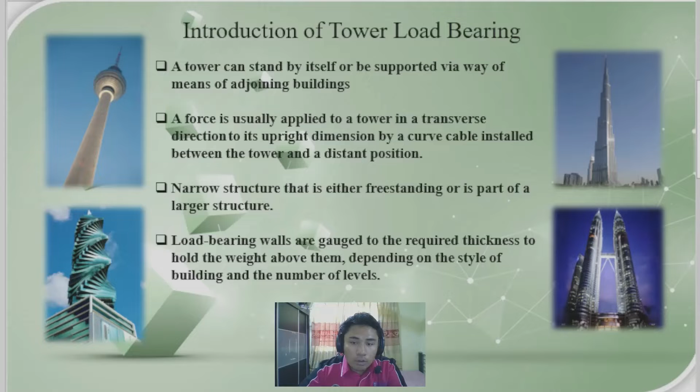Load-bearing walls are gauged to the required thickness to hold the weight above them, depending on the style of building and the number of levels. Without this, an exterior wall could become unstable if the load exceeds the strength of the material used, potentially resulting in the structure collapsing. This is our problem background for this project.

Straw is used as the principal structural material in straw load-bearing tower construction. The model of the tower must not weigh more than 0.7 kg and be 25 cm in length, 25 cm in width, and 30 cm in height to meet the project's requirement. The project goal is to construct a sturdy and stable tower.

Furthermore, the project recommends that the ability to sustain the maximum load be used as a criterion. While investigating the highest force applied to the structure, establish a design solution and calculate for the load bearing tower model the normal stress, normal strain, thin cylinder, and column.

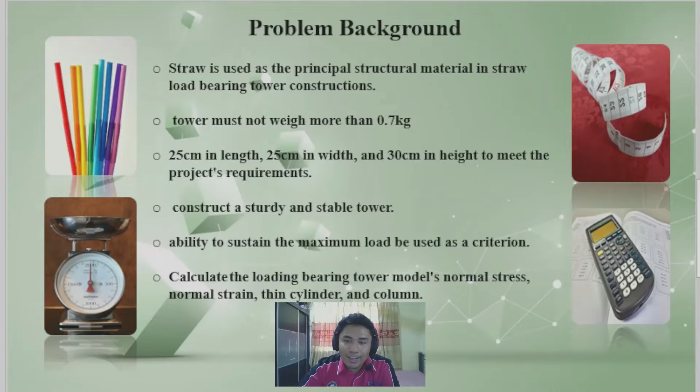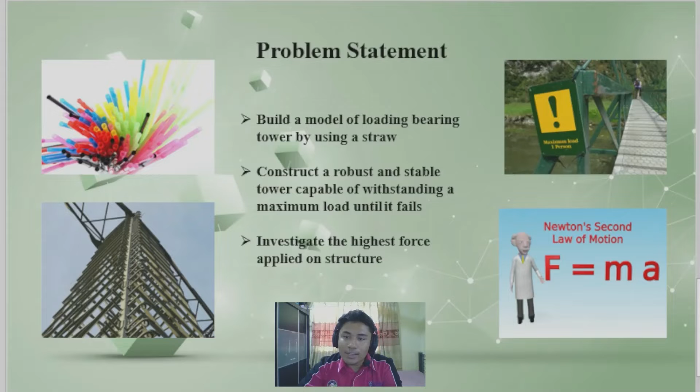For our problem statement, first, to build a model of a load bearing tower using straw. Next, to construct a robust and stable tower capable of withstanding a maximum load until it fails. Lastly, to investigate the highest force applied on the structure.

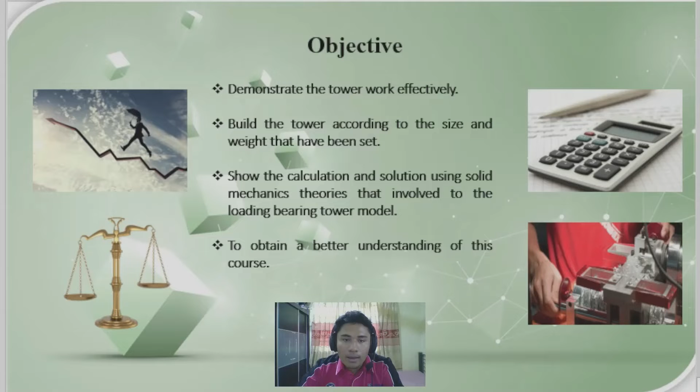Next is the objective of our project. First, to demonstrate that the tower works effectively. Second, build the tower according to the size and weight that have been set. Thirdly, to show the calculation and solution using solid mechanics theories involved in the load bearing tower model. Lastly, to obtain a better understanding of this course.

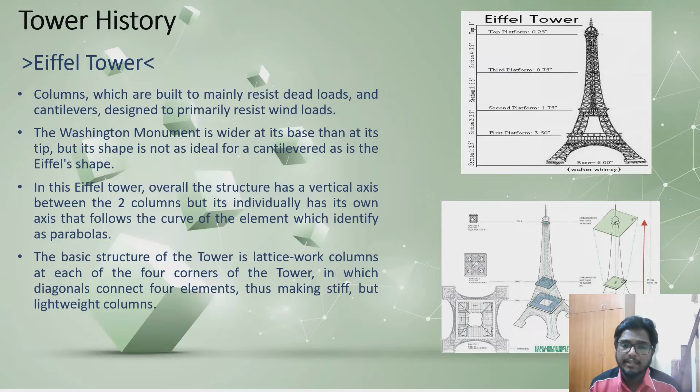My first slide is about the Eiffel Tower, about its history. In the Eiffel Tower, overall the structure has a vertical axis between the two columns, but each individually has its own axis that follows the curve of the element, identified as parabolas. The basic structure of the tower is a lattice work column at each of the four corners of the tower, in which diagonals connect four elements, thus making stiff but lightweight columns.

The Eiffel Tower is one of the towers outside Malaysia. Even in Malaysia, we have a lot of towers like that, like the KLCC towers. One example I took is the Langkawi Sky Bridge, located at the top of the gondola ropeway, 660 meters above sea level. The bridge consists of a curving deck, 125 meters long, suspended from a single spindle-like truss tower that leans back at an 80-degree angle. I've given a picture of it, on top at 660 meters above sea level.

The pylon has an 81.5 meter elevation difference with the deck, approximately 55 meters above the foundation at the bottom of the gorge at an elevation of 605 meters. The deck is supported by a series of triangular trusses. A pylon is a bar or rod that supports a structure such as a bridge or an overpass on a highway. So it makes it stronger to support.

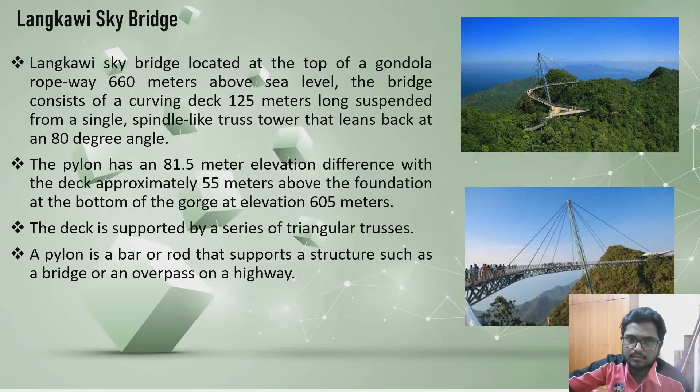Next I'm going to talk about the transmission tower. Basically, our project is about a load bearing tower. So it's about how much load an object, a building, or a tower can sustain.

So the tower is a balanced construction with four legs that may be used for tower lines with spans of 250 meters or more. The tower consists of a pylon with cross arms connecting by hanging insulators.

Why is it hanging? Because during sunny days, the metal in the wires will expand. So when it expands, it will become more straight. So if it's straight, then there must be some defect. So that's why it is created as a bit hanging. So next we can see the transmission towers are classified into tangent suspension towers and angle towers.

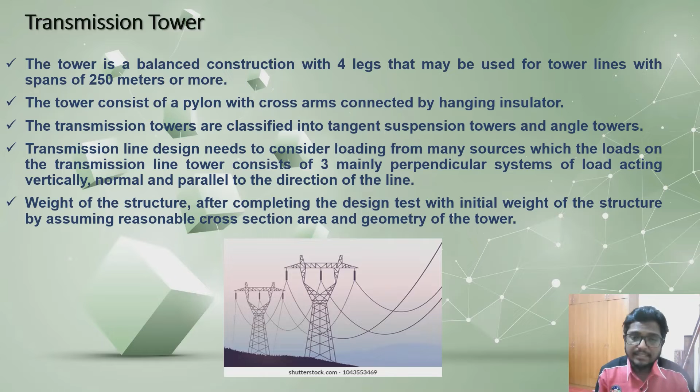Transmission line design needs to consider loading from many sources, in which the loads on the transmission line tower consist of three mainly perpendicular systems of load acting vertically, normal and parallel to the direction of the line. Weight of the structure after completing the design is tested with the initial weight of the structure by assuming reasonable cross-section area and geometry of the tower.

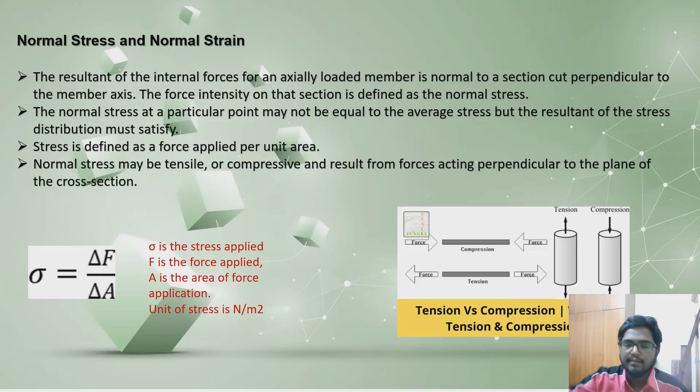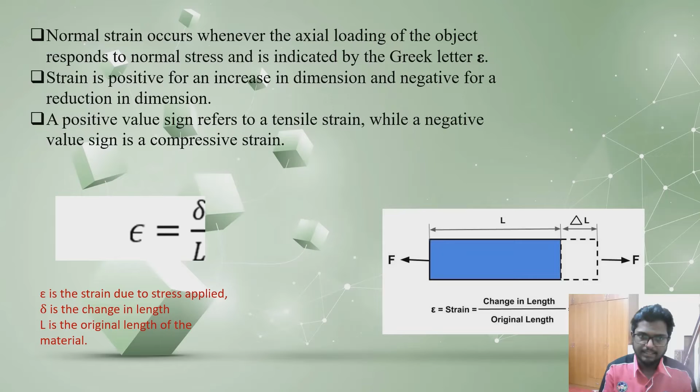So the deformation of the beam is usually expressed in terms of its deformation from the particular unloaded position. The deflection shall be measured from the initial neutral surface of the beam to the neutral surface of the deformed beam. Before bending, the beam is in an initially straight position, is of a uniform cross section and has the same modulus of elasticity in tension and compression.

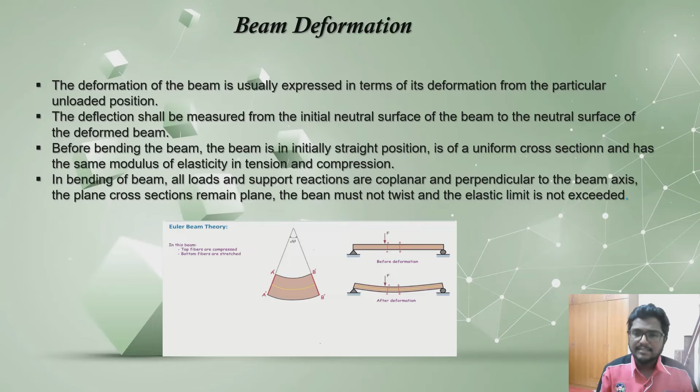In bending of a beam, all loads and support reactions are coplanar and perpendicular to the beam axis. The plane cross sections remain plane. The beam must not twist and the elastic limit is not exceeded. Okay, now we are going to look at thin cylinders.

Normally, thin wall refers to a vessel having an inner radius to wall thickness ratio of 10, or 1 over 10 of the radius of the container. Under this condition, the stress within the wall could also be considered uniform. There are some applications of thin cylinders used in industry, like pressure tanks. When the diameter of the cylinder is divided by the thickness and has a value larger than 10, that means the cylinder is thick. But if the value is smaller than 10, the cylinder is assumed to be a thin cylinder.

The function of this is to calculate the state of stress in thin cylindrical or spherical pressure vessels. So we can see the cylindrical vessel with principal stresses and spherical vessels. So a spherical vessel is a closed structure containing liquids or gas under pressure. So this looks like sigma, right? So actually the hoop stress is equal to the longitudinal stress, which is equal to pr over 2t, where r is the inner radius. T is the thickness.

And then Mohr's circle for in-plane transformation reduces. So the shear stress, hoop stress and longitudinal stress are constant.

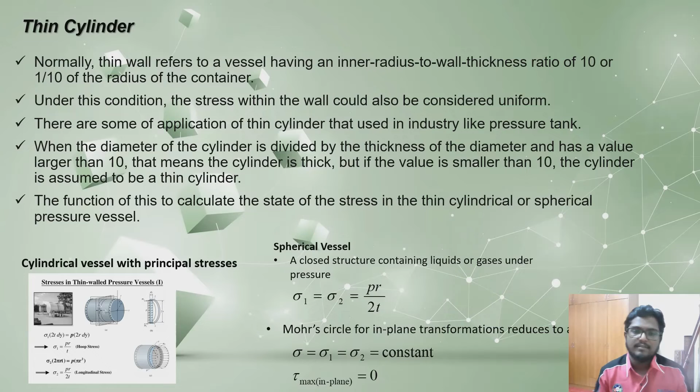Columns are long slender members subject to an axial compressive force. The lateral deflection that occurs is called buckling. A column will buckle about the principal axis of the cross section having the least moment of inertia. So PCR is equal to pi square EI over L square. I is the moment of inertia, E is the modulus of elasticity of the material.

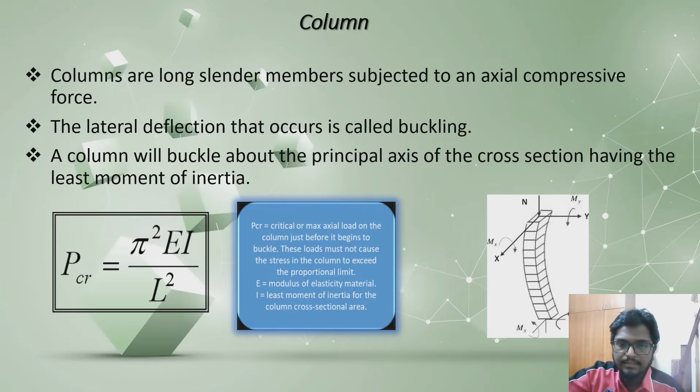Columns with various types of support basically have two formulas. One is Euler's formula, PCR is equal to pi square EI over (KL) square, which is equal to pi square EI over LE square. So to calculate the critical stress, buckling stress is equal to buckling load over cross-sectional area. Otherwise, stress CR is equal to PCR over A.

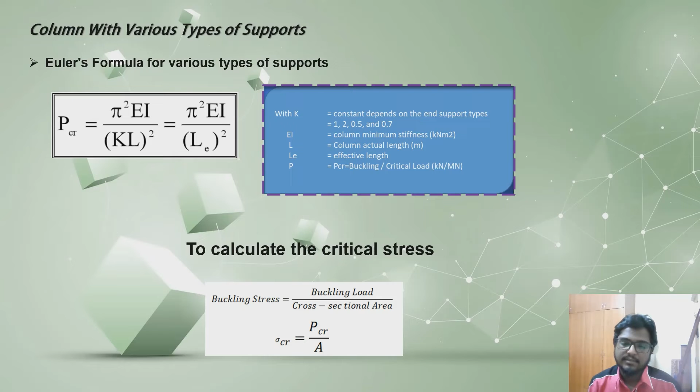So I will explain about the project methodology. First, we make a flowchart. That is, first we start with the title given by the lecturer, project information, then sketch the tower design, prepare items and materials, build the tower model, test the model, report the project and presentation, and finally we end.

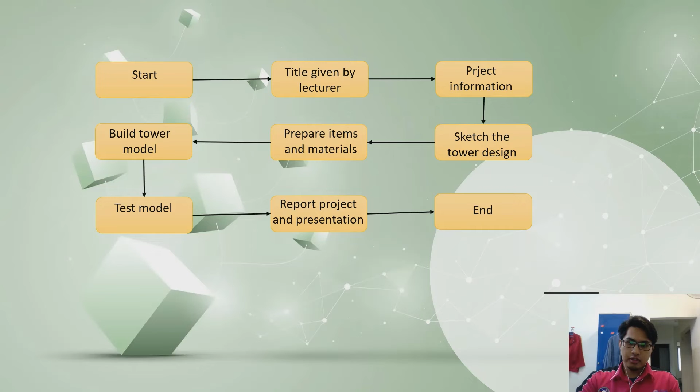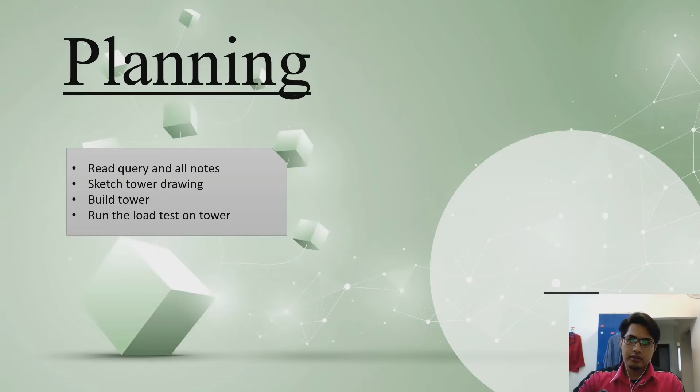Then we do the planning. First, we read the query or notes, sketch the tower drawing, build the tower, and run the load test. Data collection and design selection. So first, we collect sources of information from most of the articles on the internet, and then the design is inspired by the signal tower and has a rectangle shape on each structure to support. Because the rectangle shape is a stronger shape, we use this on our model tower.

Then the working process. First, we sketch the tower. Then we gather all the equipment needed, buy all the needed equipment, make a tower post, and then attach the posts to make the floor, and then attach all the framework, and the full tower is done.

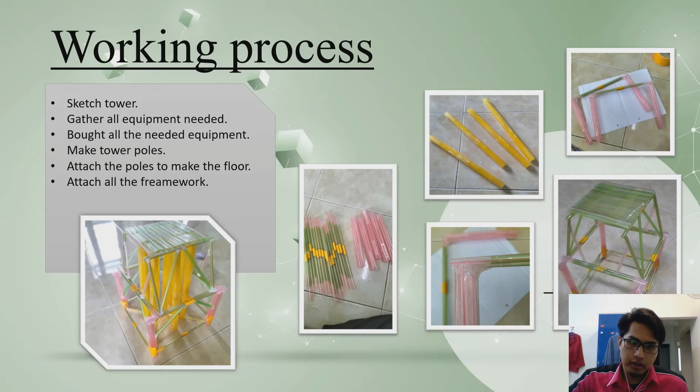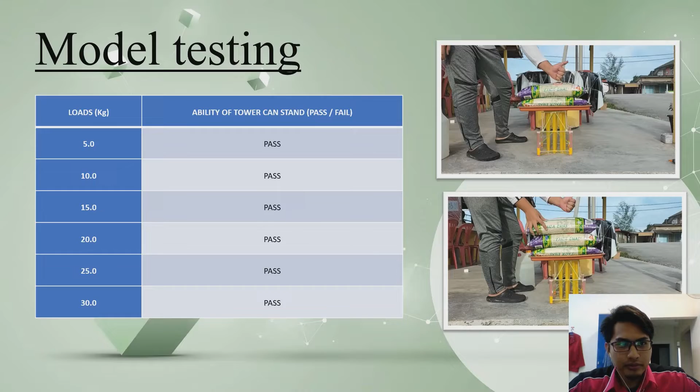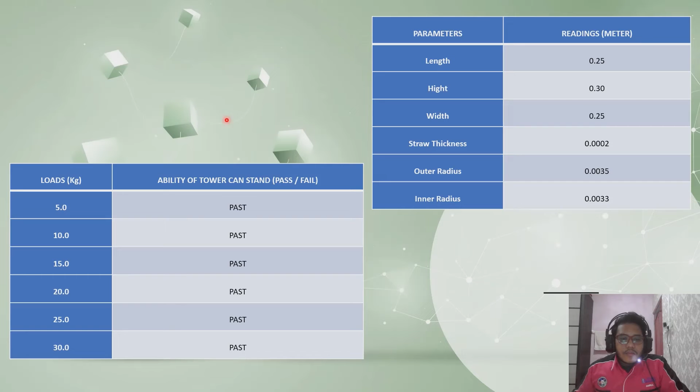Today I want to present about the result. Okay, the first table shows the ability of the tower to stand, and our project can stand until 30 kg. And the next table shows the parameters of the tower. Okay, next is the calculation of the normal stress. The strength of force, or force per unit area acting normal to the area, is known as normal stress. The formula of normal stress is P over A.

First, we find the area by R squared O minus R squared I. R squared O is the outer radius and R squared I is the inner radius. And next, P is the force acting on the tower. 30 times 9.81 equals 294.3 Newton. And we substitute the values of P and A, and we get the normal stress is 68.92 megapascal.

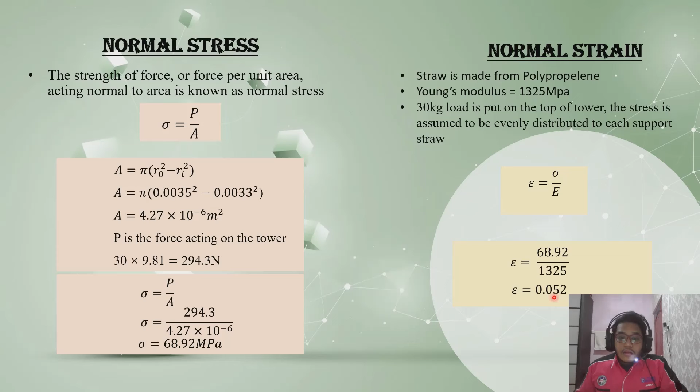Next is the normal strain. Straw is made from polypropylene, and the Young's modulus of the straw is 1325 megapascal. A 30 kilogram load is put on the top of the tower. The stress is assumed to be evenly distributed to each support straw, and the formula is normal stress over Young's modulus, and we substitute the values and get 0.052.

Next is the thin-walled cylinder. Calculate the hoop stress and longitudinal stress operating on the top of the tower due to the straws under 30 kg loads, using 26 straws to make up the top of the tower. We find P equal to 30 times 9.81 over 26, we get 11.32, and we calculate the hoop stress, PR over T, we get 1.30 kilopascal, and the longitudinal stress is PR over 2T, and we get the longitudinal stress is 650.9 Pascal.

Next is the column. The structure can withstand up to a particular amount of force when the force is applied. At some point, the tower can crumble or collapse. The critical load is the greatest force that a structure can withstand before failing. The formula of the column is PCR equals pi squared EI over KL squared. First, we find I, and we get 2.47 times 10 to the power of negative 11, and we calculate the column. We get the value of the column is 10.34 Pascal.

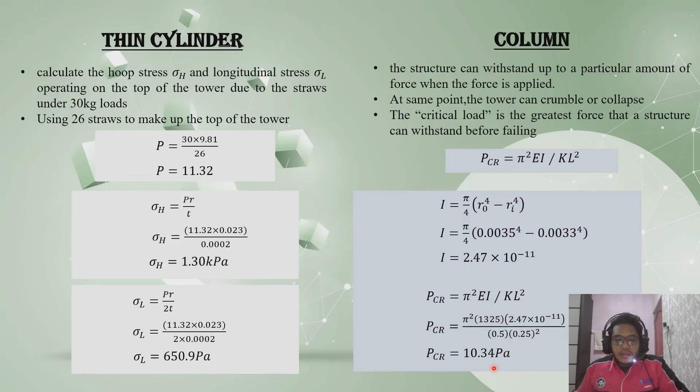Okay, next is the conclusion. At the end of the project, we get more knowledge, and we consider the length, width, height, and weight of the structure. We also achieved our objective, which is we have learned how to apply the knowledge of solid mechanics concepts in this project. Truss design is the most important aspect because it supports the load and boosts the tower rigidity.

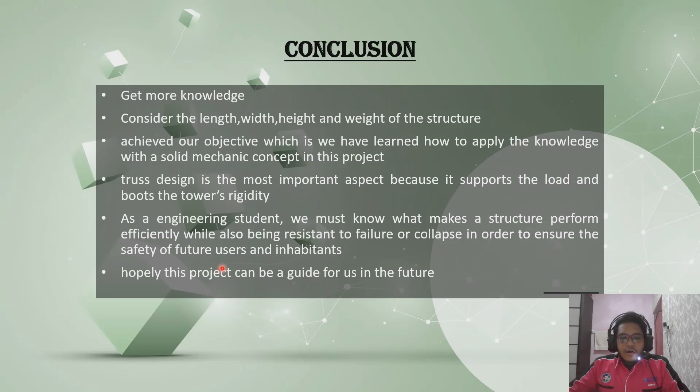As engineering students, we must know how to make a structure perform efficiently while also being resistant to failure or collapse in order to ensure the safety of future users and inhabitants. Hopefully, this project can be a guide for us in the future.